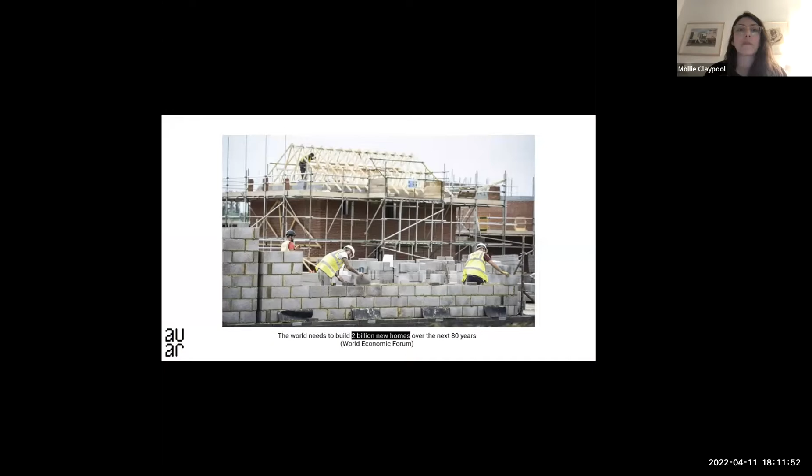So in our work, we think about the ways in which we can dismantle the power structures that have contributed to what we know as the status quo in the built environment and built environment production, where existing methods of production and the policies that frame and reproduce these methods are not really geared to address major global issues.

Now, in the UK, we have a huge scarcity, not just of companies that are able to produce and deliver housing to meet the kinds of needs that we have here. We have 2 billion homes needed over the next 80 years, but we also have a scarcity of land, where we have half of England being owned by less than 1% of its population.

Now, this has created a scenario where in the UK, over 8.4 million people, or to give you an idea of what this means, 1 in 7 people are affected by the housing crisis. These numbers represent different kinds of housing precarity, for example, homelessness or overcrowding or rent arrears, etc.

And existing methods of architectural production are really not geared to this issue. They're also not geared to issues like the climate emergency. For example, if the cement industry were a country, it would be the 3rd largest emitter in the world.

And just like architecture and construction, planning is also not generally well suited to deliver on these kinds of needs. Now, in many places like the UK, planning practices are often heavily top-down, and they engage in processes that treat community consultation as though it's an afterthought.

And this produces a lack of trust in planning processes and a culture of NIMBYism, or not in my backyard, within those communities themselves. And this further widens the divide between housing developers and the local communities that they're building for.

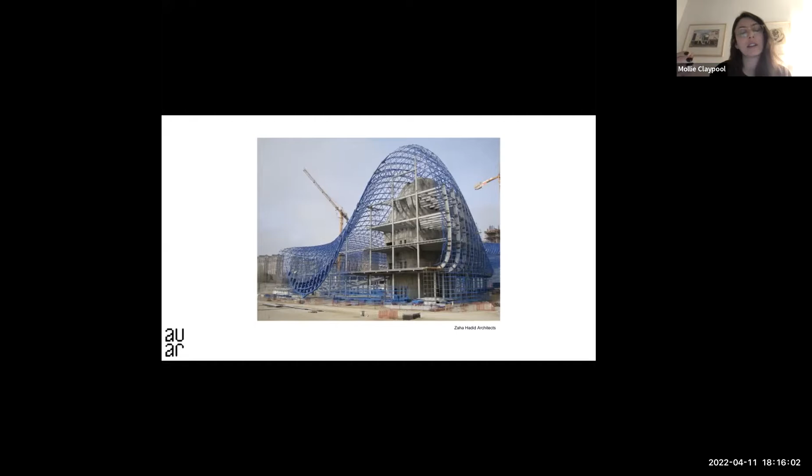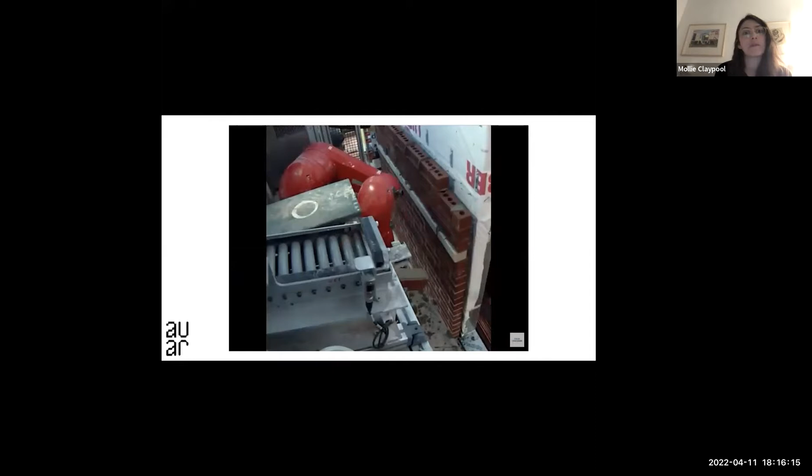And we're really in danger of folk politics playing out in new arenas globally when it comes to one of the biggest opportunities that we can see in built environment production to begin to address issues like the housing crisis or begin to provide alternative solutions. And for me, that's automation.

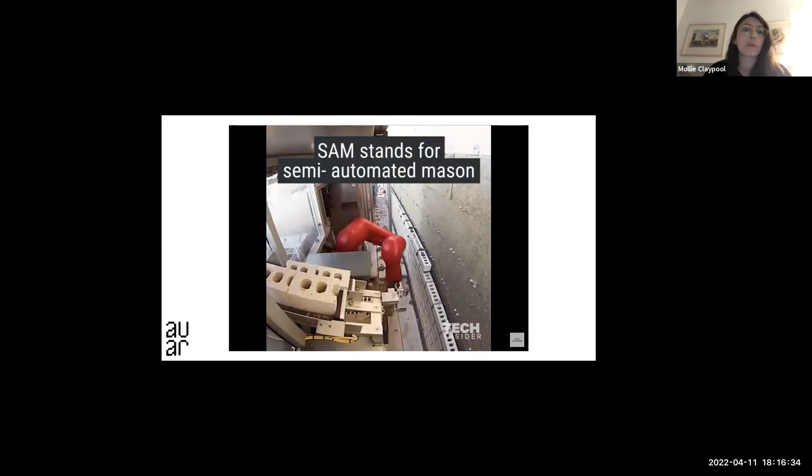Now, for decades, the dominant narrative around automation in construction, for example, has been around the loss of jobs using manual labor. Now, often the technologies that are developed to replace these jobs focus purely on productivity gained by implementing, for example, the use of a single task robot, in this case, the bricklaying robot, but you also see tile laying robots, welding robots, et cetera, are obviously very common.

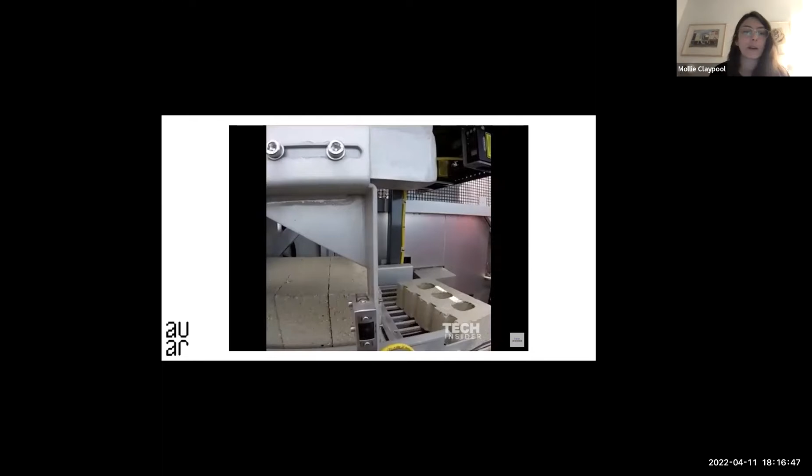And other benefits, such as improved worker health, are really treated as a peripheral positive outcome rather than being explicitly embedded in the conversation around this technology's development. And it's also really important to note that these kinds of technologies are products that are really only available for those with extreme wealth to begin with.

When it was launched in 2015, Sam, the bricklaying robot by Construction Robotics, cost $500,000 US, and it currently costs £16,000 a month to rent in the UK. And yet these robots are extremely limited. We actually see them now on secondhand markets in the UK, because while they're technical innovations in digital fabrication or digital construction, they're solving very narrow and very localized problems within the industry itself.

So let's zoom out as well. If we take a similar approach to automation as automobile manufacturing, we see modular housing factories such as Katerra, or Katerra's old factory, or Legal and General in the UK, really resulting in the centralization of housing production to off-site factories. And this really disconnects this production from the context in which these systems are deployed.

And the workers that build the housing systems produced in mega factories are currently imported onto building sites from elsewhere. And this results in the marginalization of local employment and economic development opportunities. Factory-made housing is then seen by local communities as displacing local jobs, and this in turn creates resistance and skepticism amongst local communities, beginning to create really limited localized capacity for housing produced using automation. It's also not marginally different from other examples in history.

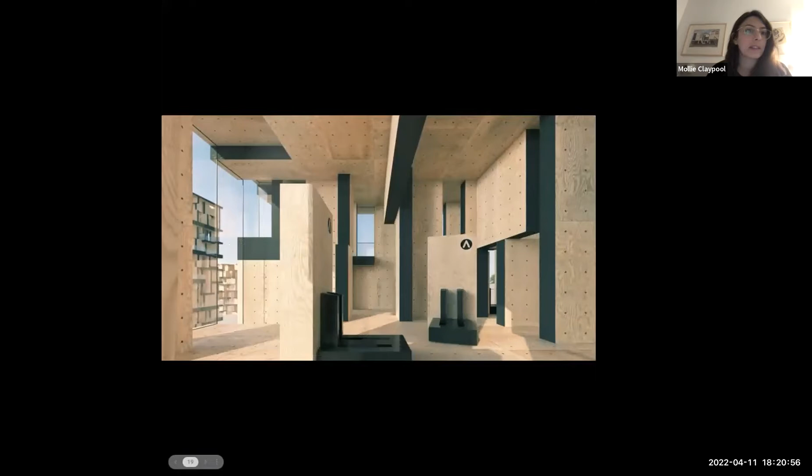So while we know that digital architecture tries to play innocent, automation is not innocent. It automatically forces positions. It forces us to question what a fully automated society would mean. Would we all need universal basic income? Who owns the robots? Which jobs remain? Will we all live in housing created by big tech?

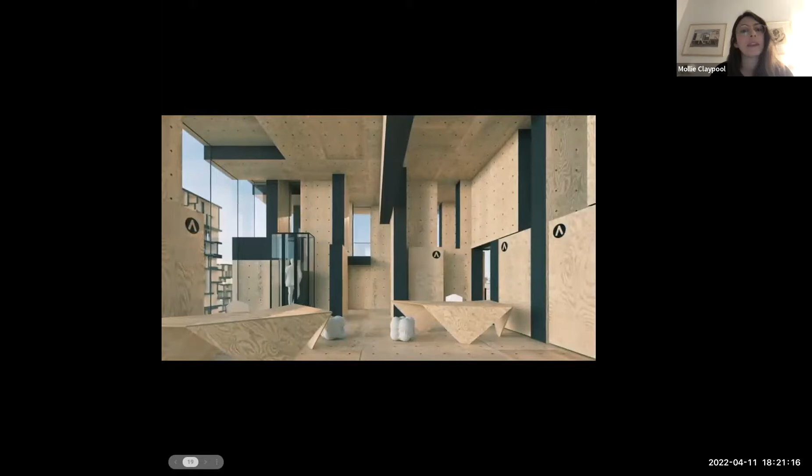These are questions and deep cultural issues within architectural production and society that highlight the incapacity of current practices to adapt to automation. Yet when we use this term, automation, we're suddenly able or even forced to really think about labor, to really think about jobs being lost in new kinds of rust belts, about control and about ownership. And then we're not forced to see automation as an embodiment of folk politics, but we're forced to see it as a design project.

And then we have to ask if this is the model for architecture that's widely failing in the face of automation, or even what we may recognize as a kit of parts system still has thousands of bespoke parts that need to be made and produced in processes that are suitable to other industries.

So then we ask, what is an architecture that is designed for automation? And this has become the backbone of much of our work in the research lab and also in our spinout company, AUAR Ltd, for the last 3 years.

What we've proposed is that we must radically redesign how architectural parts are designed in relationship to automation, in two ways. The first is as a process, in relationship to what technologies we use, but also as a framework for production, in relationship to the context we're working in and how accessible the benefits of automation are for the people we work with and serve.

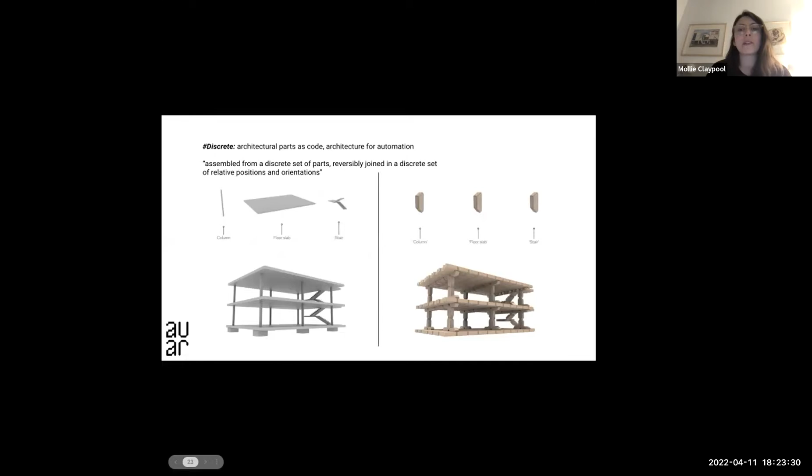This approach, the Discrete, familiar to those at UCL, treats architectural parts as code. Parts are not constrained to types like column, floor slab, beam, or staircase. So a slab is not just a slab. Importantly, the discrete parts enable us to really think about issues of reversibility and difference in orientation.

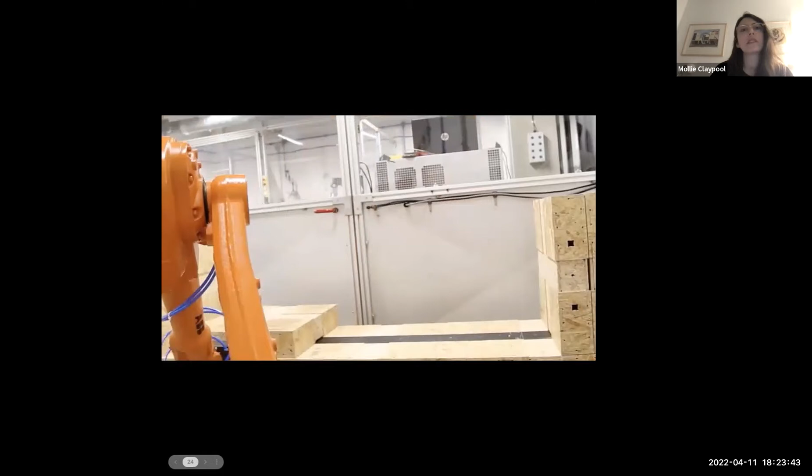What we see this enabling in our work—this is some work with our students from about three or four years ago—is an architecture that's entirely digital.

Discrete architecture is architecture perfectly made for automation. It speaks to automation's best qualities for architectural production, because robots capable of building work best when they do the same or extremely similar tasks over and over. The seriality and repetition of working with one discrete part is thereby mirrored in the robotic behavior, in this case in its assembly behavior.

In our research lab, we've explored collaborative robotic approaches as well, where we can begin to understand the potential line between robot worker and human worker. This helps us co-create, co-design, and anticipate increasing automation and the impact it might have on how people interact with automation within the communities able to access it.

We've also developed modular robots that operate semi-autonomously as a form of collective intelligence—in this case, the pizza bot. The question that started this was: can a building robot be the size of a pizza box? It's a modular distributed robot with the exact same geometry and scale as the building part itself, and it's capable of moving on its own without any external locomotion.

When we deploy this at the building scale, we begin to see the modular robot blurring the boundaries between what is building and what is automation. This enables the robot to almost entirely merge with and negotiate the configuration and reconfiguration of the building. This allows us to speculate on what's possible to change and adapt over the span of, for example, a day—active robots moving more passive building blocks, configuring and reconfiguring living spaces.

If we start even earlier in the assembly process, we've begun to develop automation at the scale of the architectural element, the part itself, trying to understand at what point in production—from the very beginning to the very end—automation is most useful. We're seeing that it's oftentimes at this scale, similar to the scale used in the automobile industry.

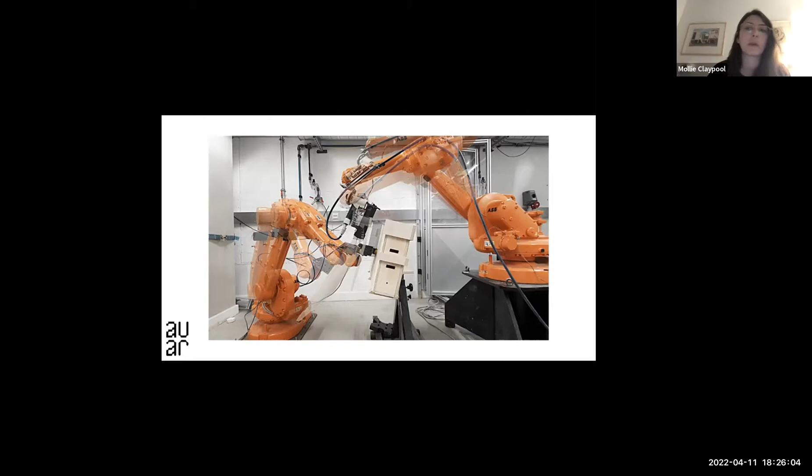But what we also argue is that we need to be thinking, as we do this, about preserving the way people interact with this process in really intuitive and simple ways. So the architectural part, for us, needs to be designed with this interaction with people in mind. Part of the intelligence embedded in the discrete architectural parts we use is a strategy to empower communities to participate in design and making, particularly in the design and production of their own homes.

Let's talk for a minute about our building system used in AUAR Labs. This is Block Type A. Block Type A takes from modular mass production of the last 70 years, where the same part can be industrially produced, repeatedly cut out of sheet material, reducing a significant amount of waste compared with other customized or bespoke cut parts. It can also be manufactured almost anywhere in this kind of just-in-time model for production.

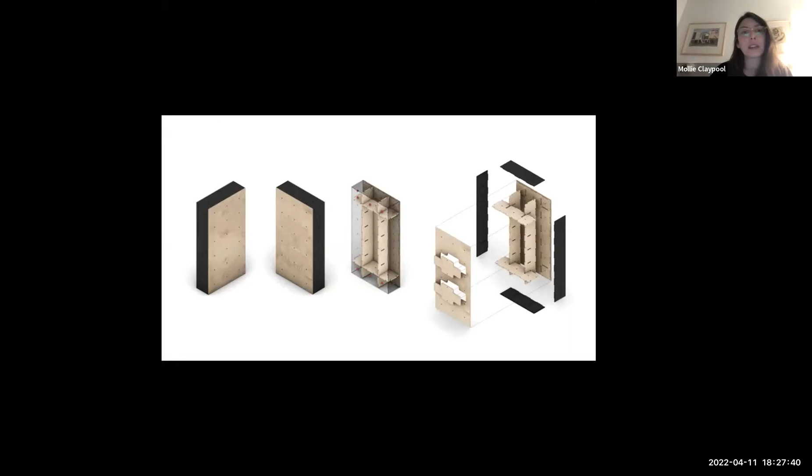In Block Type A, one sheet of 4x8 timber sheet material equates to one discrete building block. Block Type A is a prefabricated post-tension system, although we've moved on from this exact system now. This version incorporated post-tensioned reversible connections that allow for the reconfiguration and adaptation of the building system assemblies over time, so we can adapt the system to various changes.

This is based on principles from digital materials, a concept drawn from mechanical engineering with principles of part variation and part reversibility behind it. This really enables the versatility of the architectural parts, and this is just a suggestion of some of the possible ways that Block Type A can be combined together.

Now, the simplicity of block type A also allows us to introduce ideas around automation using mini versions of the blocks. This has become a toy for engagement with people who have an interest in housing or technology, but who have never been able to get close to these ideas before, or close to automation before. We use this as a backbone for the workshops that we run within communities.

This is an example from just before COVID in 2020 at a community-run, community-owned manufacturing hub in the southwest of England where I live. Very recently, we have displayed this idea for an exhibition called Shaping Space, which was the Victoria and Albert Museum at the Building Centre in London, where designs by the public were automatically captured by a tag and tracking system.

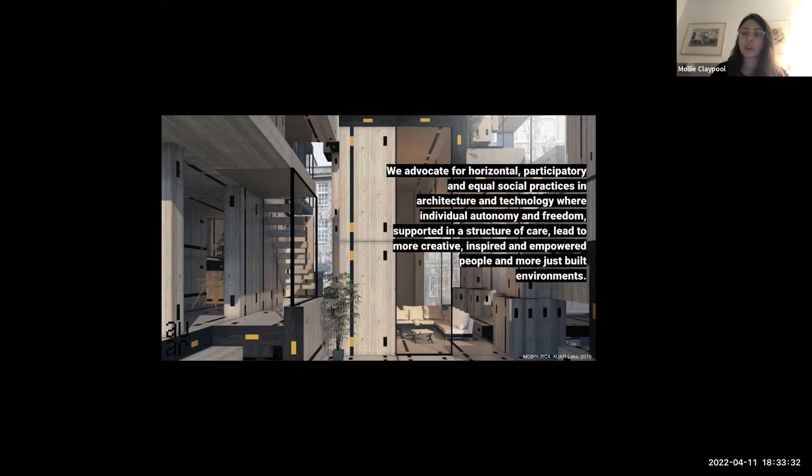At its backbone, it advocates for horizontal, participatory, and equal social practices in architecture and technology, where individual autonomy and freedom supported in a structure of care lead to more creative, inspired, and empowered people and more just built environments. So, for example, the consensus-based decision-making model, as well as dynamic rank structures, play a role in this mission lock and in how we develop practices with our collaborators.

What we found is that this mission lock really makes the process of design production work for us. It enables us to make it much more accessible for people that are typically othered by professional practice and industry, and really widens the boundaries of who can participate in the work.

A core question we really ask ourselves is: what is the capacity of an engaged scholarship or values-centered approach to enhancing citizen-led design using automation and new housing and construction systems? Engaged scholarship is the equalizing of power relations, democratic practices, situation-based action, mutual learning, tools and techniques, and alternative visions about technology.

Oh, that's annoying, this video doesn't exist. Great. Imagine an image of a design application. I'm just going to talk about that for a sec.

We developed a web-based combinatorial design app that was built in 3 weeks, just before COVID hit in 2020. It's a web-based interface.

Hopefully you'll see an image of it later. Somebody's moved things around in my Google Drive, which is really annoying.

It can enable us to very quickly develop projects with block type A. And as it's web-based, it doesn't require any specialist technology, just internet access.

We use the Combinatorial Design App both as a training tool and as a leveling-up platform between everyone in the communities we're working with and involved in the project. We're also using it with other people we're working with to give us a tool to communicate design decisions in real time, really quickly, in a highly accessible way.

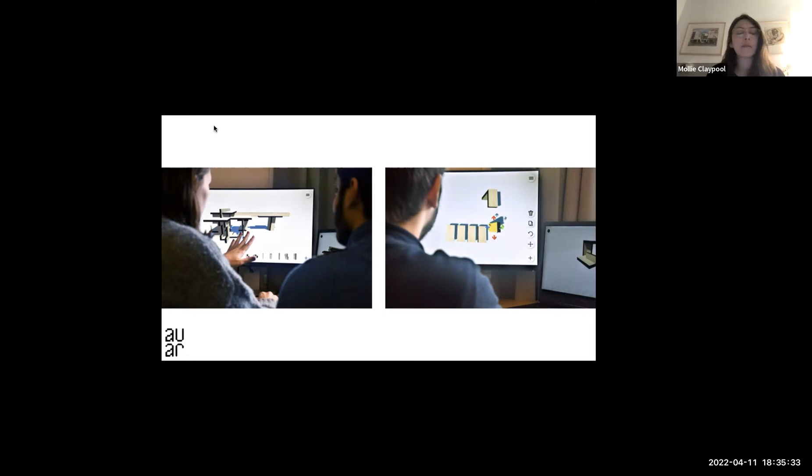For those we work with who don't have access to technology, one of the things we've done is provide the tech needed for them to utilize the application, as well as a home kit of mini blocks that allow them to both play digitally and physically with the building system itself.

Oh, another one that doesn't exist. Great, somebody's literally organized my Google Drive in the last 2 days. So this is something about an AR app, but we're not going to talk about that because I can't show it to you.

Recently we've been working primarily over 2020 and 2021 in two communities. One is in Knowle West in Bristol. Bristol is a city of 450,000 in the southwest of the UK, about 2 hours from London, that's where I am now. The other is in Hackney in East London, particularly around the Olympic Park.

We believe it's really important to work both with residents and policymakers in these communities. The reason why is because local residents and local governments are really disadvantaged by the current way that built production is done. There's a huge lack of trust from communities on the one hand with local governments, and an inability to take risk on behalf of local governments on the other.

Right now it's really on the edge of Bristol, this kind of edge line between the city and the rural, which in the UK, if you've been here, you'll know is a very abrupt edge in most places. Because of the way Knowle West was absorbed by Bristol as it began to expand, there's really no center to Knowle West.

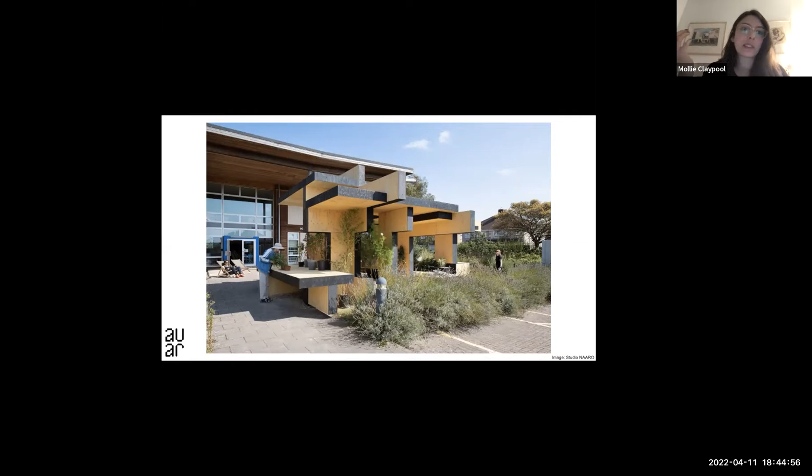This is Block West, a community housing prototype partially reconfigured in Bristol outside Knowle West Media Centre. This was the result of a 6-month-long workshop series. Block West was built out of 145 blocks, assembled together in less than 2 weeks, and the project provided 25 part-time jobs in the local community throughout the 6 months.

For us, it wasn't just a pavilion. It's a housing prototype where we experimented with new ways of living and working. It also acted as a training program, similar to what we did in Hackney, for more permanent roles being created in the community for the We Can Make Homes project, which is citizen-led housing we've been involved with.

In Block West, our group of 25 was also 50% women, and we had people aged 12 to 76.

John Bennett, one of the local residents who worked on Block West and has continued to work for us, was quoted saying: 'The community has been at the heart. I never felt any top-down pressure. For me, it was about my personal development. I felt like I had a web of support around me with no barriers and no boundaries. I could dream it, I could say it, I could make it. It was really empowering, and for once in my life I wasn't being told no, you can't do that. Instead, everything was doable.' Now this is really important in an area like Knowle West, where there's no center or community hub, and where there's been historically very little investment.

It's often a place where money washes through rather than adding sustainable value or social infrastructure. So through our continuing work in Knowle West, we aim to provide a social infrastructure that can become the community hub that's missing from this area.

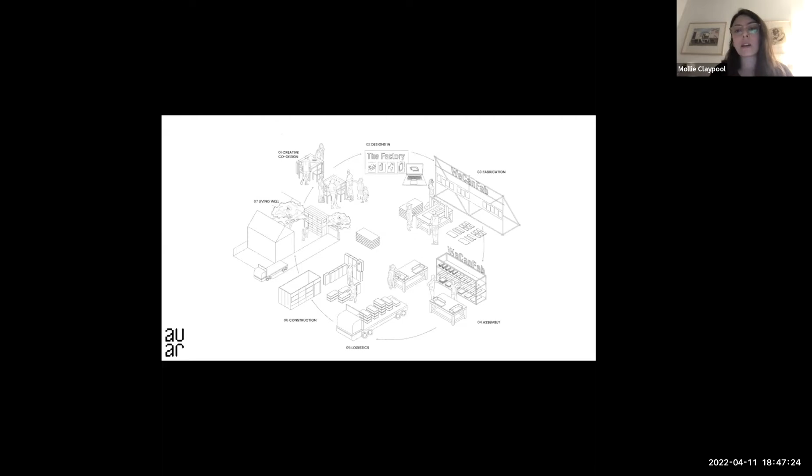We're actually doing this now as a kind of follow-on from the Innovate UK project, which took place throughout most of 2020 and the beginning of 2021. As part of this project, we envisioned and co-developed a design for a housing factory that then changes over time into housing as the housing gets built up around it.

They have a Future Creatives program. Future Creatives is a work experience program we've been working with, providing young people interested in careers in architecture and design to curate their own public programs in response to some of the questions we ask around automation.

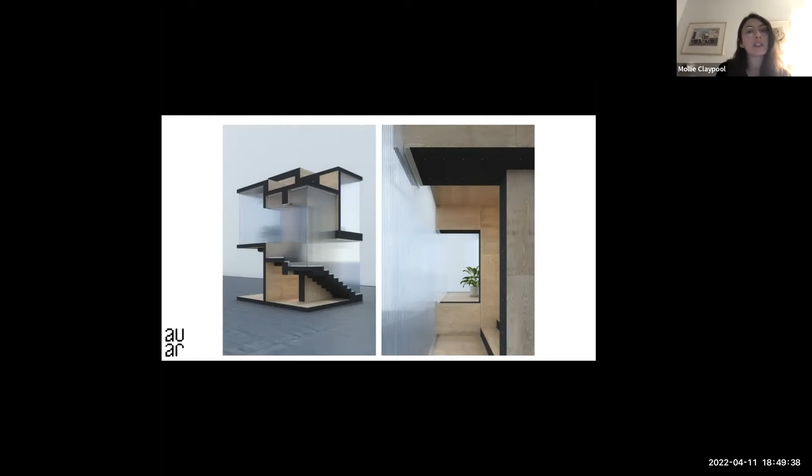This project was started in 2019 and was a kind of slow burner for us. It was in partnership with Hackney Council, the local government in London, and started as a conversation around how Hackney Council could use smaller bits of land they own, and how they could activate those bits of land by engaging local communities in network building, to begin rethinking how we build housing.

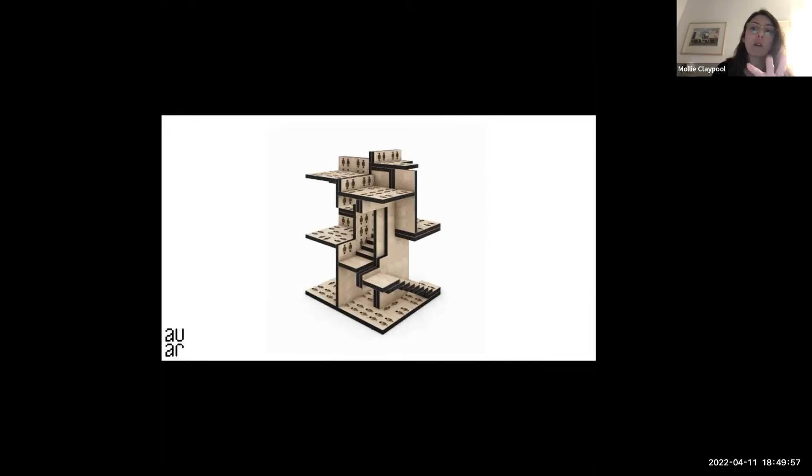House Block - I'll show you some final images in a minute, but this is an animation of how we built it. There was a core part to House Block, and that core structure had next to it and around it a set of blocks that were used to design a series of public program takeovers by our community partners.

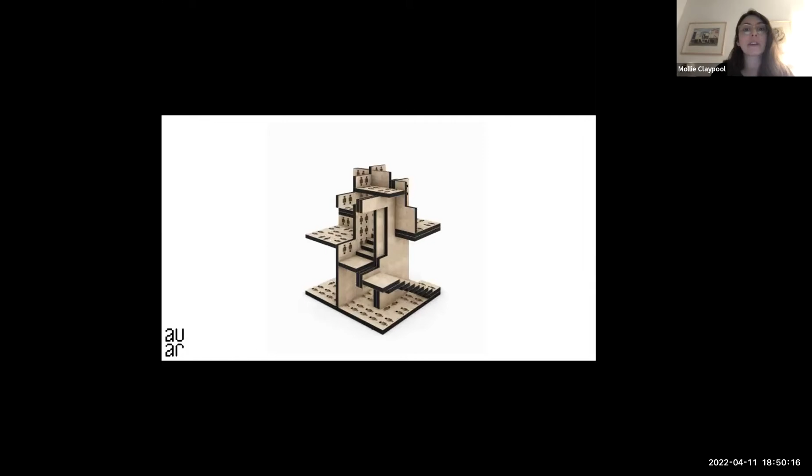Our community partners began to adapt the structure over the course of our occupation of the site, by a crew of local workers who had been part of the project for a year and a half. We provided space for sound installations, dance pieces, meals, barbecues, filming, etc.

There was one takeover where a speculative living room was constructed at the front of House Block and used as a platform for performances and talks. During the sessions to build each takeover, we provided paid opportunities for local people to get involved with the project, to try to enable as much as possible the participation of as diverse a group of people as possible.

This site - I wish I had a picture of the wider site, I don't think I do - it's a really interesting site. It's on the site of an old playground. To the left there's an old school occupied by guardians, which in the UK is people who pay a very discounted rent to stay in, essentially to protect buildings that are going to be developed at some point in the future, but oftentimes they can live there for 5 to 10 years. It also has some 1960s housing blocks just behind it and Victorian terraces just to the right, so it's a really diverse typological area of London, and it slopes down to the River Lee.

In the small builds, we reached over 100 people in the local area, with many more involved in the public program takeovers themselves. This was, for us, a journey that brought us together with not just the council, but local community members, to discuss what home means to us and how automation can be used to provide an alternative solution to the housing crisis and to how we might begin to utilize these plots of land.

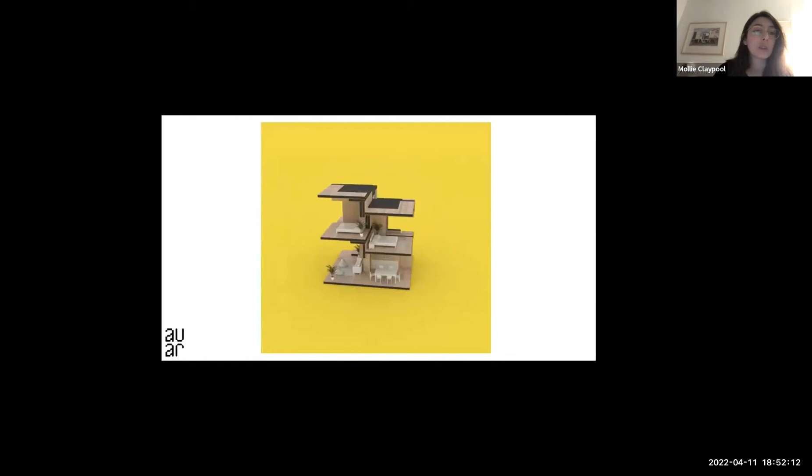The prototype also begins to demonstrate what could be achieved if we were to think about participatory approaches to housing, where local communities make use of digital modes of production, particularly in spaces that local councils have available that are deemed too risky for development, or where the council can't really do anything meaningful. We were able to show that this kind of meanwhile use of a site brings on board communities which are otherwise perceived to be disparate and disconnected.

This is an animation of House Block, also transforming into a house, then transforming into housing - also the takeovers. So I'm going to talk next about our Block Studios.

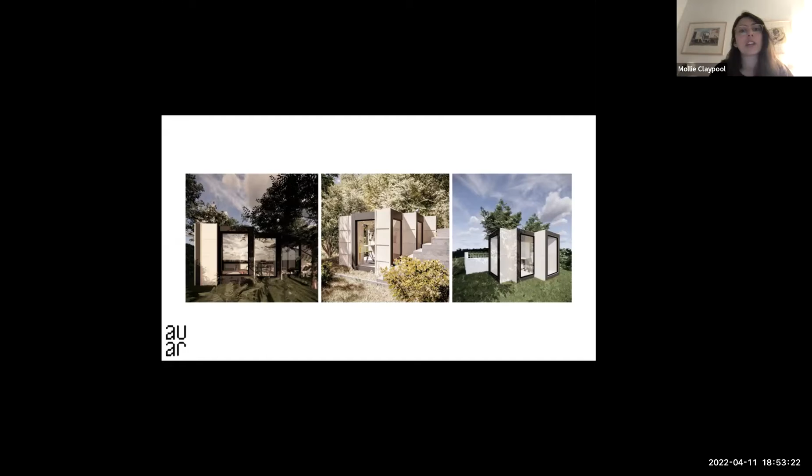As part of Block Studios, we've been working with women in the community in Bristol who all bring similar stories of structural disadvantage, which has been revealed through our prior work with them, but also aspiration for change within their own lives, within their community, and for their local community. Block Studio tries to build on the work of Block West and House Block, and primarily builds on the frameworks for labor and production within the lab.

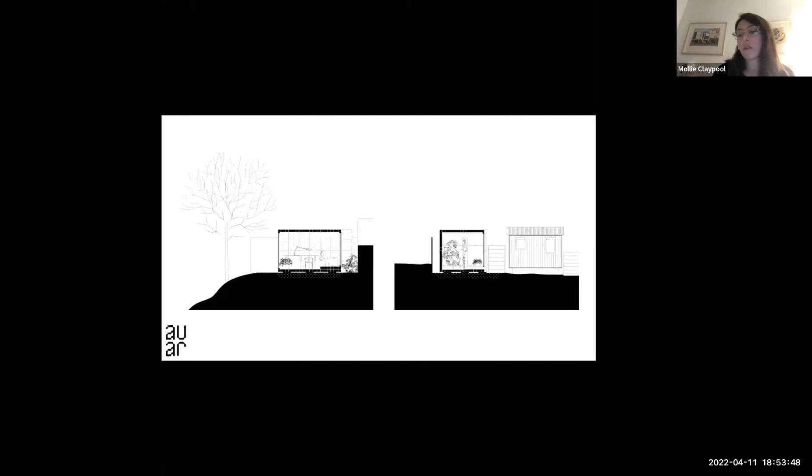Block Studios has what's called a mode of public participation with AUAR, both as a company and as a research lab. The objectives of the studios are to seed a pilot public participation program within AUAR Labs. We hope to reveal mutually beneficial knowledge exchange on local housing needs and automation opportunities in connection with projects such as Can Fab.

We have worked to nurture participant skill development, both in photography and ethnographic documentation, to help us capture local narratives from participants and residents within Knowle West and the women's networks, complementing and strengthening existing policy-focused impact strategies we've been working on.

All of the studios are really small interventions as part of a scheme in Bristol to activate micro and backyard sites. In Knowle West alone, there's over 400 sites that have been identified.

Knowle West is quite a small community. It's also a very low-rise community, and part of the wider approach to the climate crisis by the mayor of Bristol, Marvin Rees, is to densify low-rise and low-density areas of Bristol over the next 10 years, primarily because Bristol is on an estuary with a huge flood risk in most places outside the city where you'd normally see this kind of housing expansion. So actually densifying in the inner city is really important.

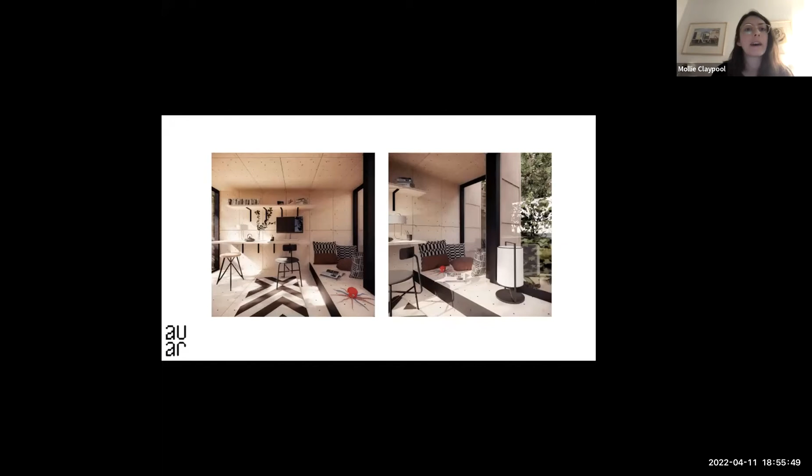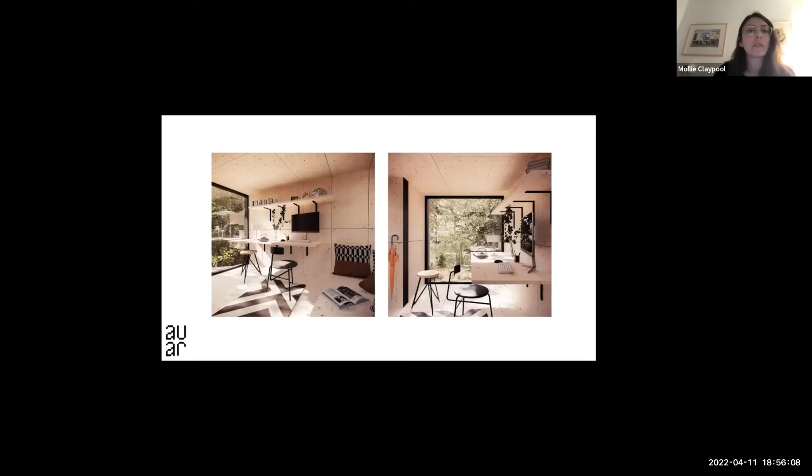Tony, for example, is a young single parent with an aptitude for photography. Hannah is a mom of two who is now leading production and site teams as part of Can Fab and with AUAR. She had never previously felt able to hold down a job, but fully immersed herself in Block West prefabrication and construction, and now continues to be employed by us.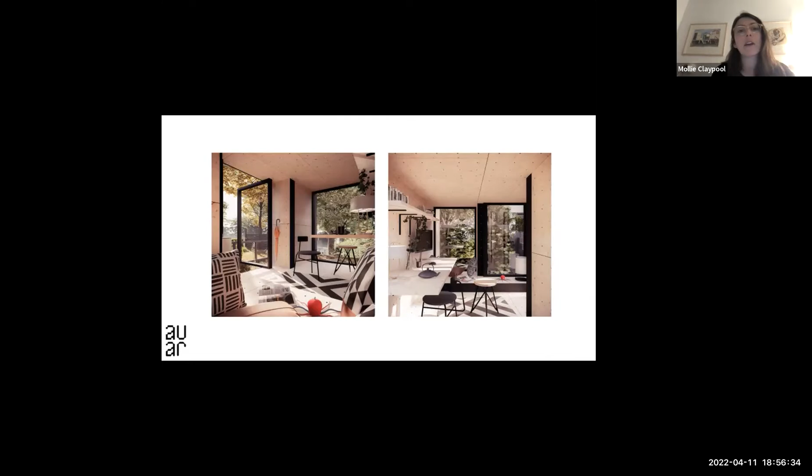Steph saw the entry point of these projects as an entry point into work after six years off as the primary caregiver for her child. Those three women in particular have expressed an interest to continue their participation with AUAR and really begin to think about how they're building an agenda of engaged scholarship.

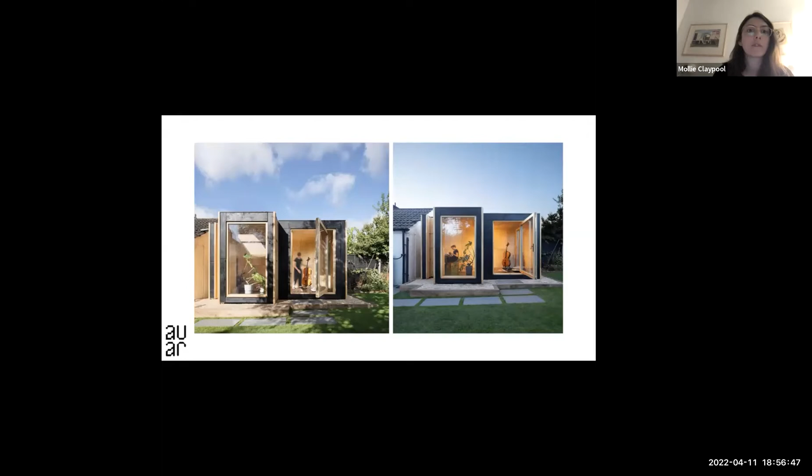The block studios use a small enough number of block type A to fit in the back of a Luton van. This makes them very easy to transport from their production places nearby to their sites, and allows us to really rethink what a factory might look like when it's embedded within a community. For example, for us, one factory equals one robot, or a space where you can assemble one block.

We realized the need to be really flexible in our delivery to accommodate other responsibilities. So with the participants in the block studios, we agree a structure for the work that works for all participants, as part of our consensus building model.

The pilot is really guided by this overarching ambition to understand the lived experience of the participants, and to begin to expand ideas of how home could offer these microsites, but also how it could begin to scale up to larger sites, which is something we're working on in AUAR more explicitly.

Now, what this begins to unravel for us is the notion of who is the expert and who is the professional—again, helping us create a more horizontal framework for wider participation in design automation, with the value created really staying within the community itself.

What that also enables is for us to think about how we can invest in social and technological infrastructure in communities, to really ensure they have the skills, knowledge, and resources they need to adapt, recognize and celebrate their interdependence, and grow resilience—not just material resilience, but community resilience in the face of these really intensely difficult questions around housing and community.